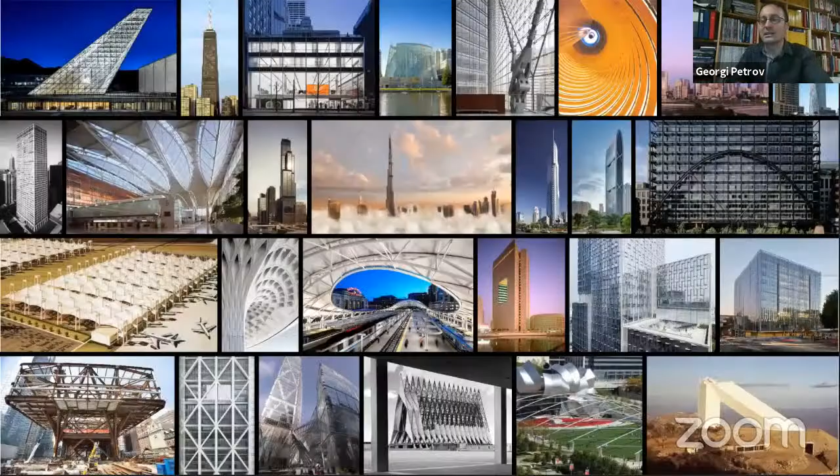We're good? Excellent. So as Sandra said, we're from SOM, Skidmore, Owings and Merrill, and we've had a long history of varied projects. We do all sorts of different types of healthcare, education, public buildings, and a lot of airports. We have offices all over the world, mainly in New York, Chicago, and San Francisco, but we also have an office in Dubai, several in China, and in London, in Europe.

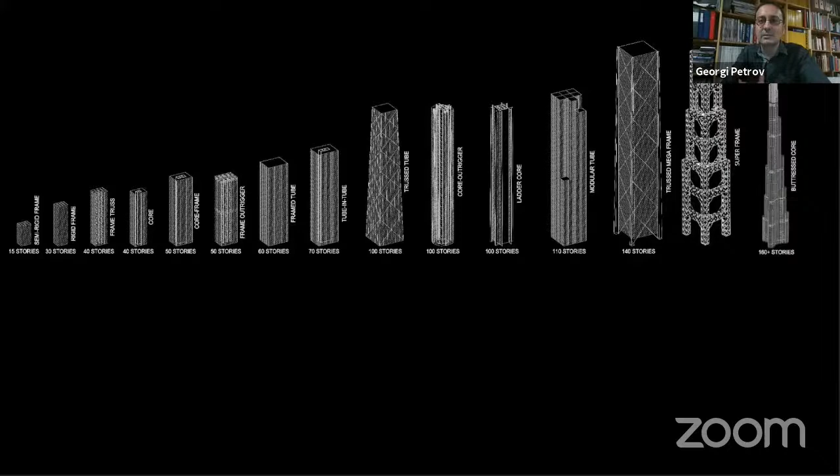Primarily, we're famous for our super tall towers. This is a little bit outdated, but at any one point, we have 4 or 5 of the top 15 towers in the world. Not only that, but we've developed the structural systems for super tall towers. Most of the different types of systems, the very first examples, were done by us at the very beginning.

There's also a wide range of research initiatives happening throughout SOM. We've actually assembled teams, interconnected across offices, working on various topics such as computational design and fabrication. A lot of these are really interesting projects for us to just learn about new processes and new materials, and then learn how to apply that to real architecture.

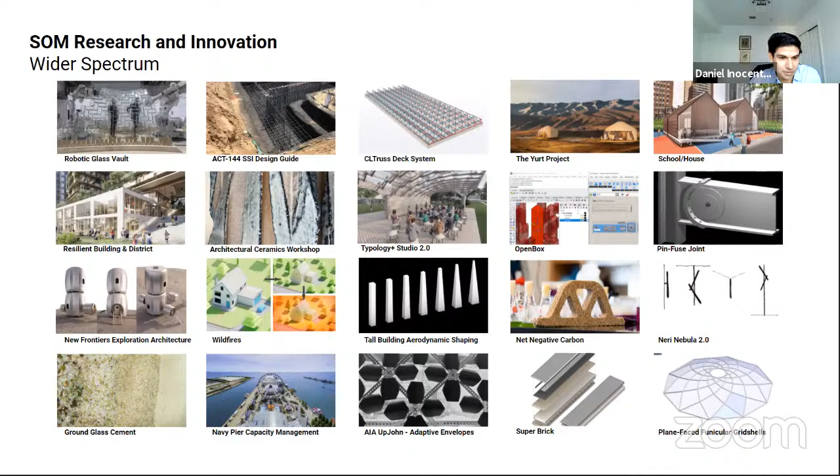Can you go next, please? Yeah. Oh, no, go ahead, go back. Sorry, there was a lag there.

This is to showcase that SOM has been involved in the evolution of how we use digital technologies. Throughout the history of SOM, there's been a lot of interest in not just implementing, but also creating and customizing digital tool sets. SOM was one of the first to actually develop its own CAD software, called AES, in the 80s, and this has continued to take place at SOM at various points in time.

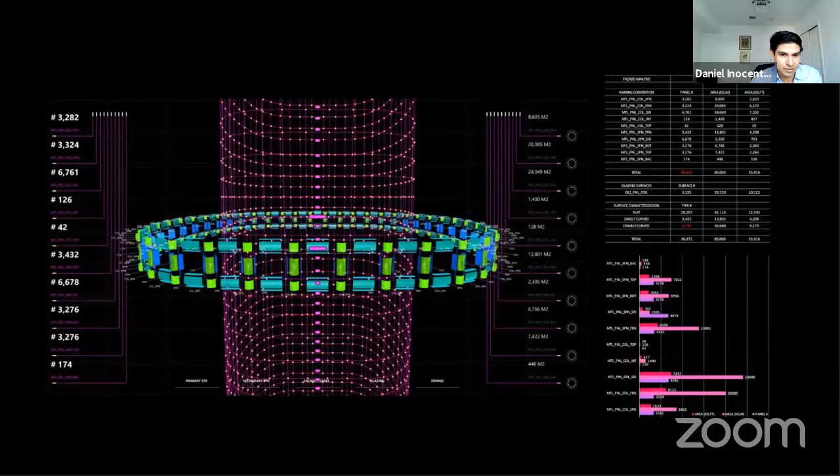This is another example of that. This is for a tower in China, where we're looking at how to optimize geometry for glass fabrication.

Over the last 4 or 5 years, Daniel and I have been trying to harness this long history of capability at SOM and apply it towards design for structures in outer space. The project we'll talk about today is our first big project of many we're having now. This was a collaboration with the European Space Agency and MIT, organized by SOM.

We tried to take the challenge that Jan Wörner, the former Director General of the European Space Agency, posed back in 2015, of this new idea of how to go to the moon in a novel way—to take the paradigm and lessons learned from the International Space Station, where instead of competing, we have a common goal. If we share a common infrastructure, many different partners can go to space more easily. So taking this idea of collaborating instead of competing in space, and applying it to the moon.

He colloquially termed it the Moon Village. There's been a very reinvigorated and interesting discussion the last few years of how to go to the moon in this better, more collaborative way.

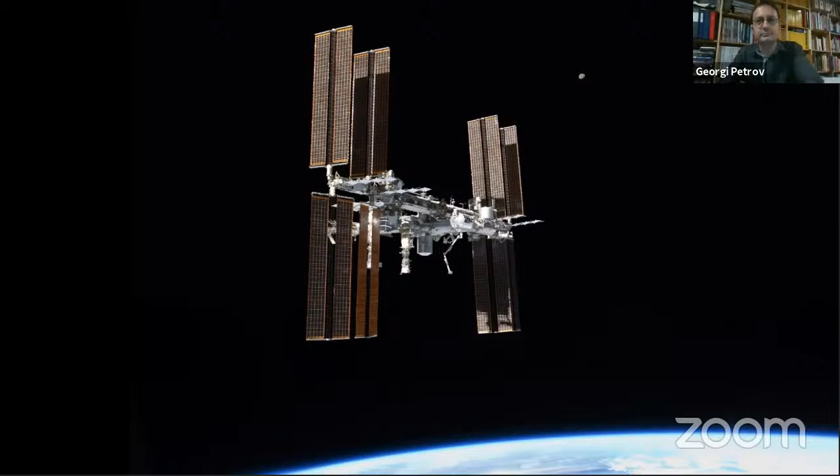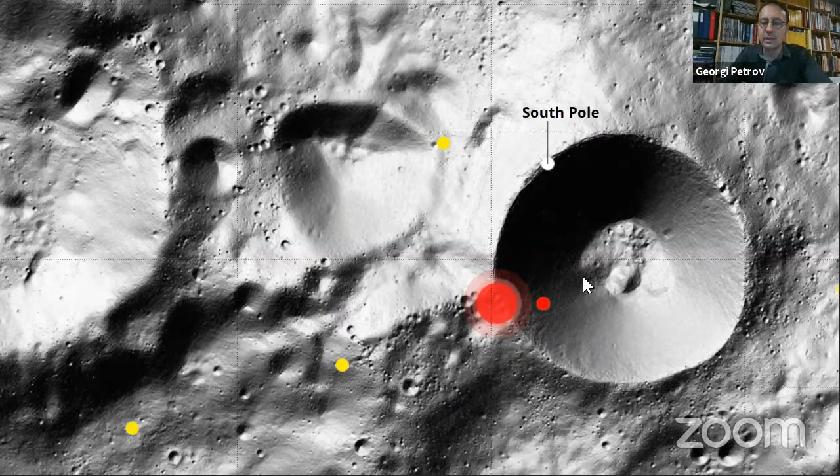I won't go into it—you probably all know that the two poles are the most exciting and interesting places to go. This is the southern polar region, with the South Pole right here at the edge of this big crater, Shackleton. There's been a lot of research on where the best place is, and we've chosen this one area along the rim of the crater to develop our project.

You can see here again, the crater is really deep, and most of the interesting science is down at the bottom of the crater, but it's always permanently shadowed. While at the very rim of it, at the highest points, it's actually lit by the sun for a large portion of the year. So you do have an opportunity for generating a lot of energy.

There's also some smaller craters that are a lot more easily accessible that you could do science on. The idea is that we have probably frozen water and other interesting volatiles hidden there, which are both interesting scientifically and interesting because they're a resource.

We looked at the long history of ideas of how to go to the moon, going back to the 50s and 60s, and more excitingly, in the last 4 or 5 years, partly spurred by this idea of the Moon Village, and partly because a lot of new and exciting commercial players are entering the field. We feel that it's finally time where soon we could realize this dream to go back to the moon in a more permanent and sustainable way.

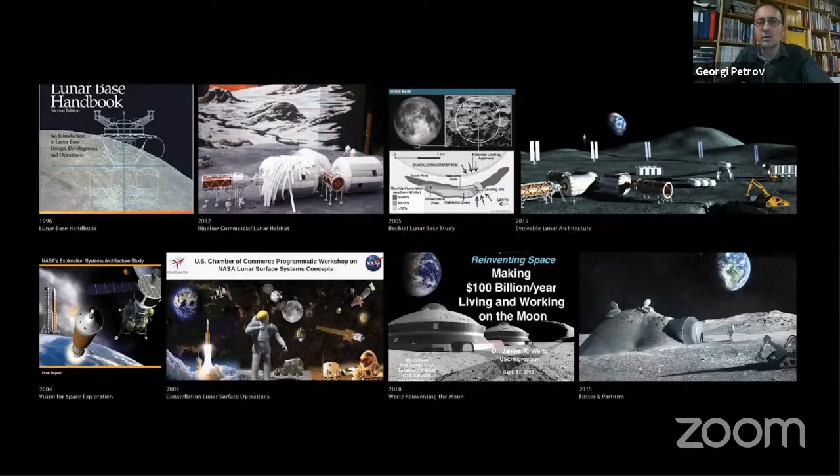So we looked at several different scales. We started with the master planning idea, and the idea that you can lay out a growing settlement with this criteria of safety—every bit of your habitat has to have access to other bits of it. So if you lose one part, you can't lose or separate different parts of the habitat. Everything has to be efficient for obvious reasons, and easily expandable.

We looked at very different urban planning ideas, and we settled on this one—the idea of a linear city, which was brought forth in the beginning of the Industrial Revolution by the Spanish architect Arturo Soria, and made famous by Le Corbusier with his plan for a linear city. Here the idea is that you could have a spine of infrastructure that grows in both directions, very efficient in moving materials and humans back and forth. But if you have several bands of it, you could have safety and interconnectivity.

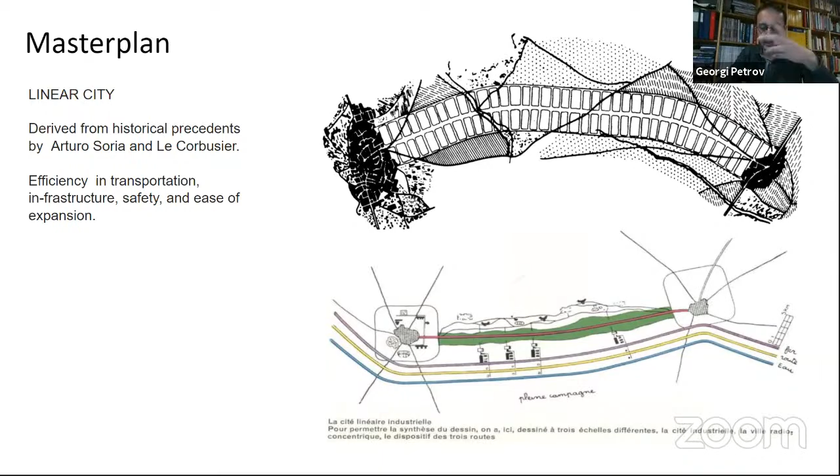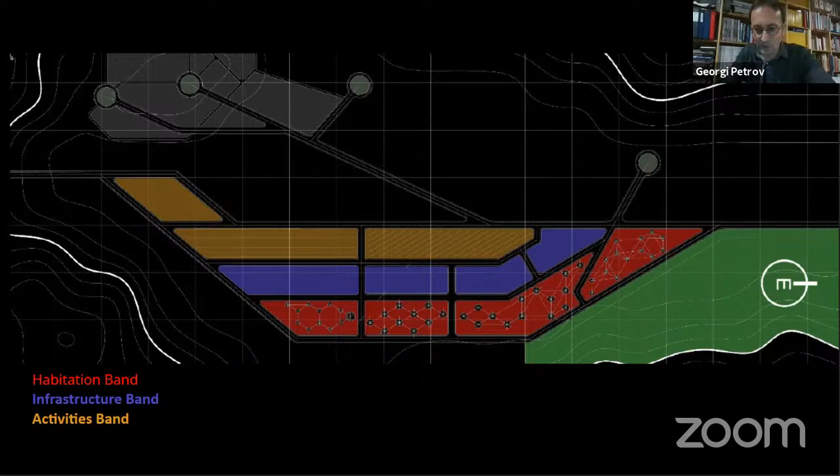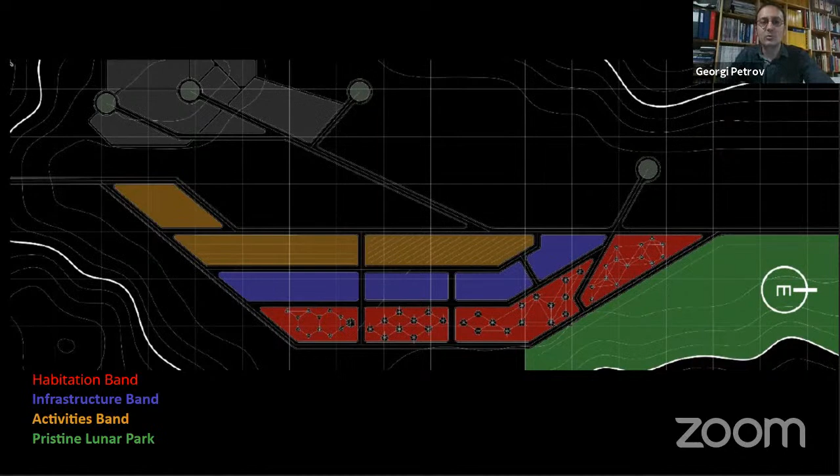So besides the engineering, we said you would need some sort of place to leave undisturbed, maybe along the crater rim in the direction of the Earth, where you would have an undisturbed piece of the moon. So as the humans go around, there's always a bit of undisturbed moon, and we thought we'd place it in the direction of the Earth, so from the habitats you always have this view of the undisturbed, pristine, beautiful moonscape, with the Earth always behind it.

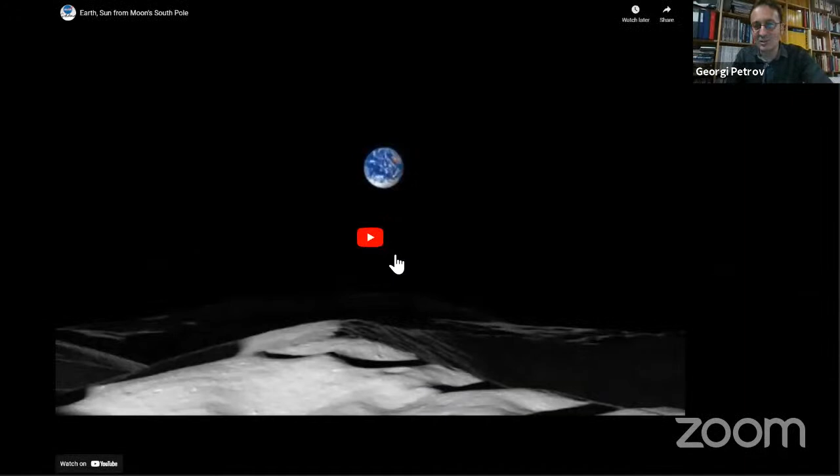And this is actually a cool view. Daniel found this yesterday, a new animation by NASA that shows that view.

This is the rim of the crater, and the sun always travels along the horizon. Because of the moon's orbit, the Earth is always in this direction. It never really strays. Throughout the month and the year it kind of wobbles, moves up and down around the sky, but it's always in that one direction. It stays like this, spinning around.

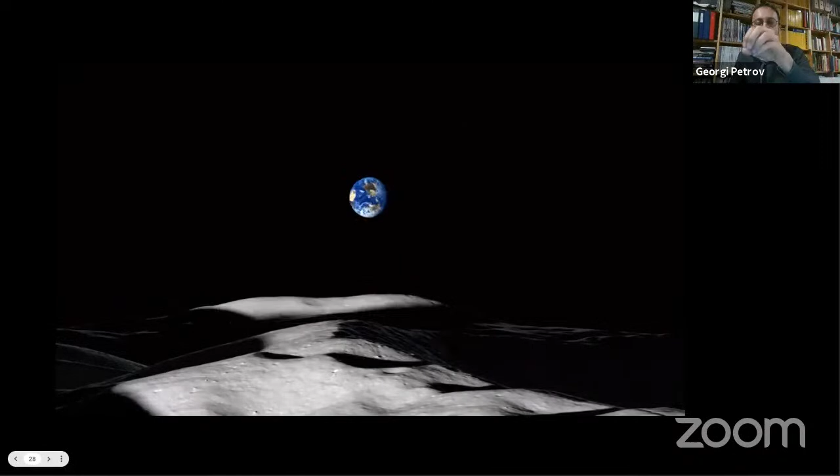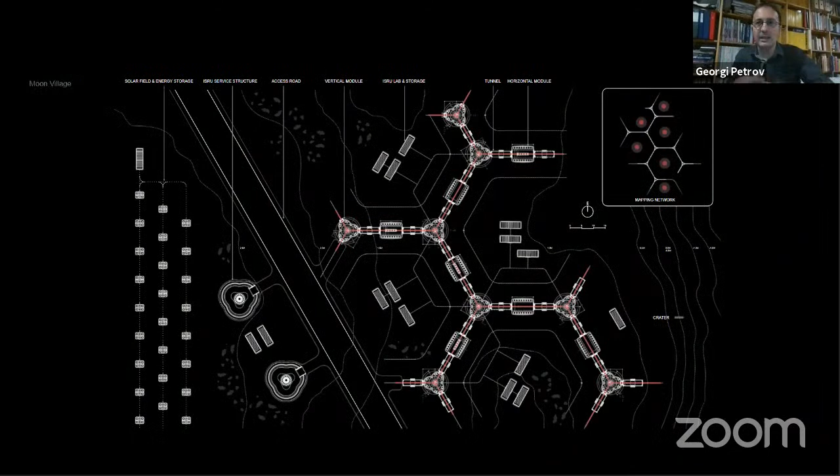So we started zooming in with this master plan idea and laying out the individual habitats, with some ideas of how they could grow together and be interconnected. This is an early stage where you have a few of them starting to be accumulated.

So going in from the master plan into what the individual habitat is.

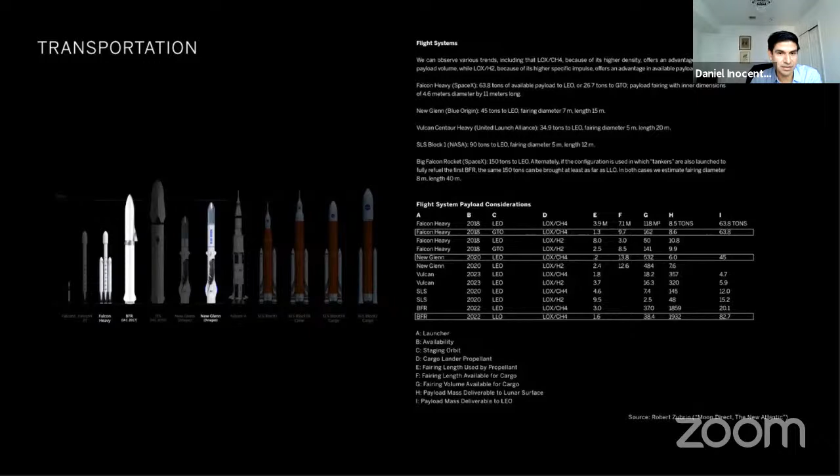The methodology was to first establish what we were trying to accommodate: a crew between 4 and 6 for a mission duration of around 300 consecutive days. The habitat had to be deployable, meaning we were designing, engineering, and fabricating it on Earth so it could be launched, delivered, and prepared on site on the moon, ready to be occupied once the crew arrives. This set the baseline objectives for how we would approach designing the infrastructure and the habitat from a human perspective.

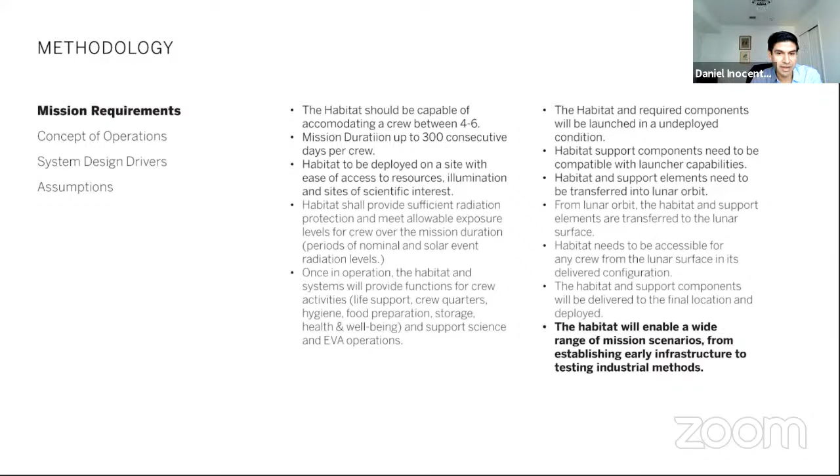The various mission phases we took a look at included testing some of the features in the habitat, since we were designing something hybrid in terms of structure; the launch sequence, looking at how we'd take the habitat into low Earth orbit; what assets we'd need to move it from low Earth orbit to lunar orbit; and what we'd need to land it, requiring a customized, purpose-built lander just for this habitat. Once down on the surface, we'd need equipment to transfer it from the lander to the building site. All these elements and features were part of the architecture we were putting together.

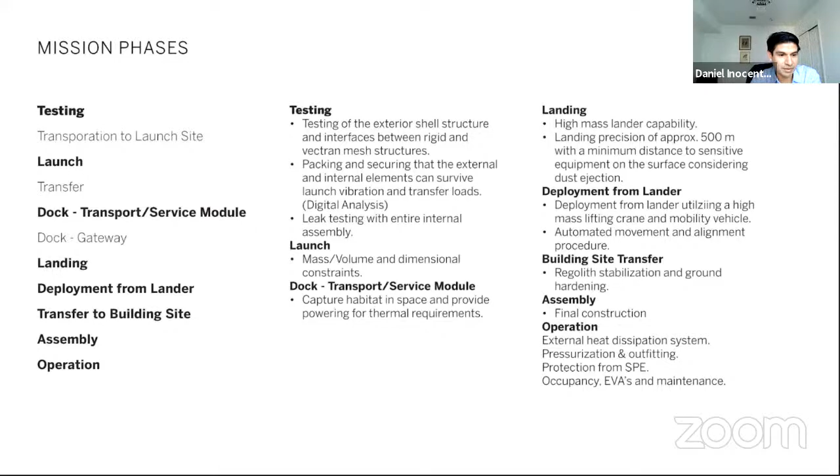Everything started with discussion about how we could use what we knew, which was a lot of architecture around the ISS. The ISS is mostly metallic structures, isogrid-type pressurized vessels with added thermal protection and shielding for impact on the outside. We wanted to take a close look at this architecture, learn from that technology, and also think about using new forms of structures already tested by NASA and deployed on the ISS through Bigelow — these were inflatable shell-type technologies.

We married the two structures, and started to look at how you could take this idea of a woven mesh and discretize it, breaking it up into different elements around the geometry, integrating that with hard elements like airlocks, metal structures, or windows. This is part of the challenge of working with woven mesh structures — how do you integrate these with rigid elements.

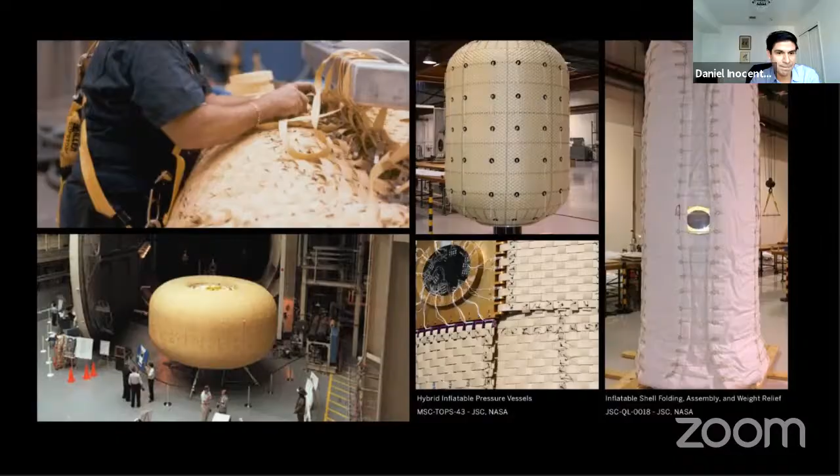This is an image of the hybrid structure we designed in its compact configuration. You can see in the illustration how you'd take this habitat, pack it, tie the shell inboard, and then protect it with a fairing before preparing it on the launcher.

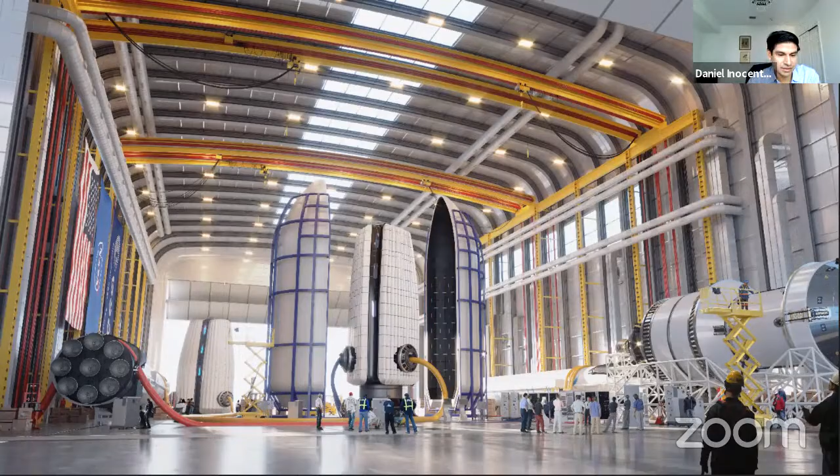Here are some of the mission components we took a close look at. The first is the habitat service module, which supplies power to the habitat when in transit, maintaining the right temperature for the life support systems. If it gets too cold or too hot, these systems with sensitive hardware and computers need to be in a controlled environment.

The other element is the airlock module, which was not part of the habitat architecture itself but external — having it outside means you avoid, or at least mitigate, bringing dust into the habitat module. There's also the tug, which had to be designed and sized for the habitat mass, since it would take the habitat from low Earth orbit and push it all the way to lunar orbit. For the launcher, we discussed various vehicles, but the SLS was the architecture we went ahead with.

And then the lander, which was also one of the biggest elements, because you need to take that large habitat structure from lunar orbit down to the surface. And of course, there's a lot of fuel involved, which actually makes up the majority of the mass. So that's something we had to consider.

And then once you have the habitat in place, you also need a power station, some form of energy to power your architecture and your infrastructure. We looked at two types of power stations: one was a nuclear fission reactor, and the other was an array of solar cells.

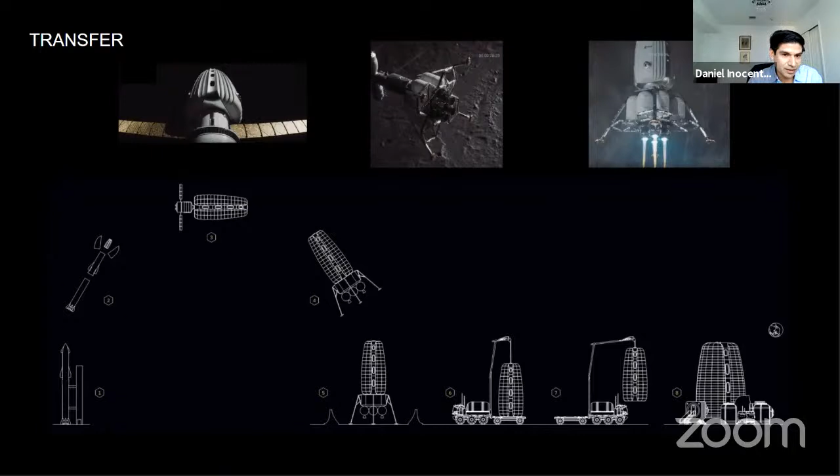If you go to the next slide, please. Here are some additional illustrations showing how we imagine the sequence of events taking place. We worked with a really amazing animation company to put a video together, so these are still shots from that animation, but some of these elements are already pretty detailed. The focus was to illustrate how you would take the habitat from this large lander, which would deliver the habitat really high up above the lunar surface. You would need a crane to take the habitat down to a platform that would then be pulled by a vehicle to its final destination, where it would be assembled and deployed.

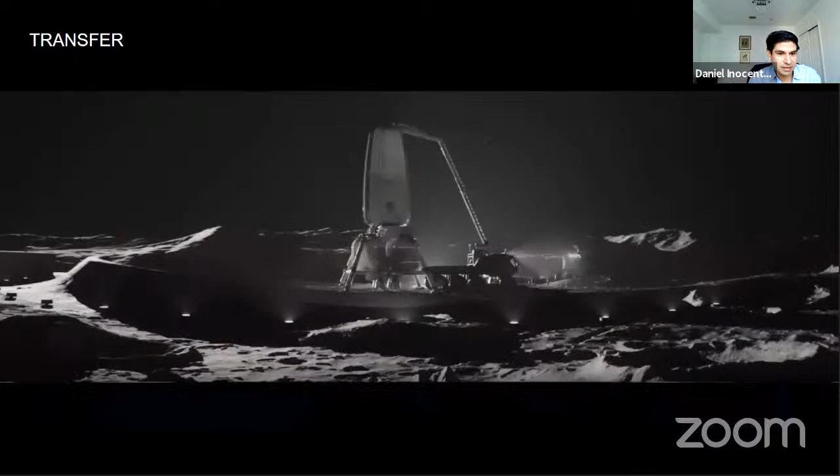If you go to the next slide, here's an image of what that looks like.

And so for crew accommodations, again, we looked at the ISS for volumes, trying to understand how much volume you would need for a mission duration that we had targeted. I think the key was that we wanted to make sure we had no less than 25 cubic meters of habitable volume per person.

But we also wanted to understand what the implications of living on the moon would be, because it's different from a microgravity environment. On the moon, you actually have gravity, so you still have to deal with friction. Your movement is very different, and you also have a wide range of spaces that you want to accommodate inside of this multi-purpose structure. After looking at various iterations and really studying what the best net habitable volume for the mission architecture would be, we landed at somewhere about 80 cubic meters per person.

And if you go to the next slide, here are just a list of the different human factors that we started to consider. Things like visibility, being able to locate what it is you're looking for or where you're going, or being able to identify equipment when it needs to be fixed or upgraded, or having proximity to computer screens and making sure you can see as much of your surroundings as possible for communication.

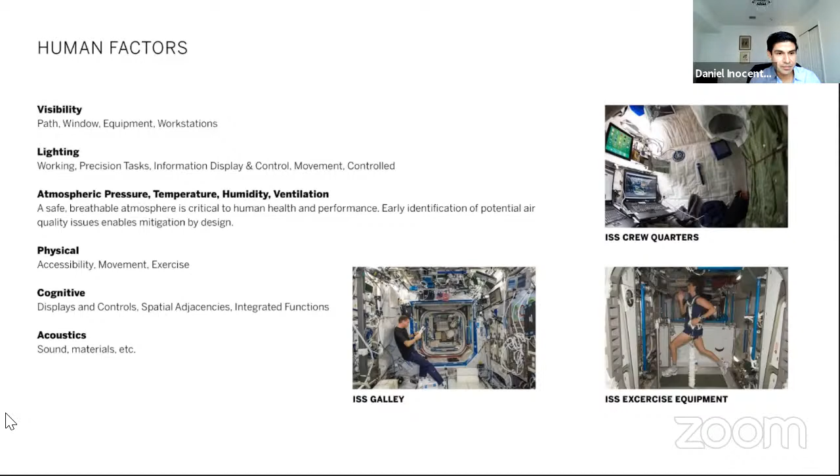If you go to the next slide. Here's another list of different kinds of human factors we looked at. Again, volume is a key element here. Accessibility, making sure you can mobilize your body from one location to the next. In our case, we had a vertical structure, so it was important to be able to move vertically through the structure. And the crew quarters, we wanted to centralize these spaces because we wanted them to be as private as possible, but also communal. There was a key design decision there in how we distributed those spaces.

Mechanical equipment and storage and supplies is another factor, which you see in these images, that there's things all over the place, whereas in our design we really tried to emphasize the need to locate mechanical equipment and storage in locations that are accessible but don't impede your mobility or your focus on what it is you're doing, so you can put these in certain locations behind panels. If you go to the next slide.

Here's an image illustrating how we thought about daylighting. This is pretty typical for how we approach design, but it's really unique in this case, because electric lighting is always there to supplement natural lighting. We always want to use natural lighting as the main driver. But when you're on the moon, natural lighting is a real challenge, so you have to find ways and opportunities of creating these natural rhythms. This could be done through locating lighting on various surfaces below, at eye level, and above you.

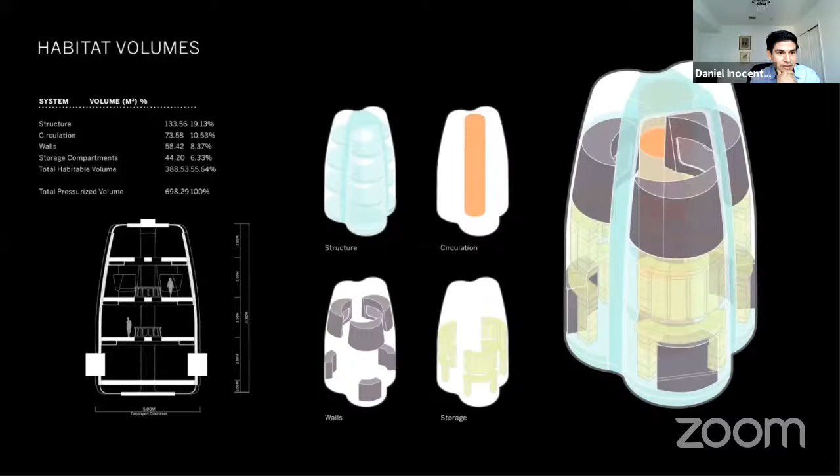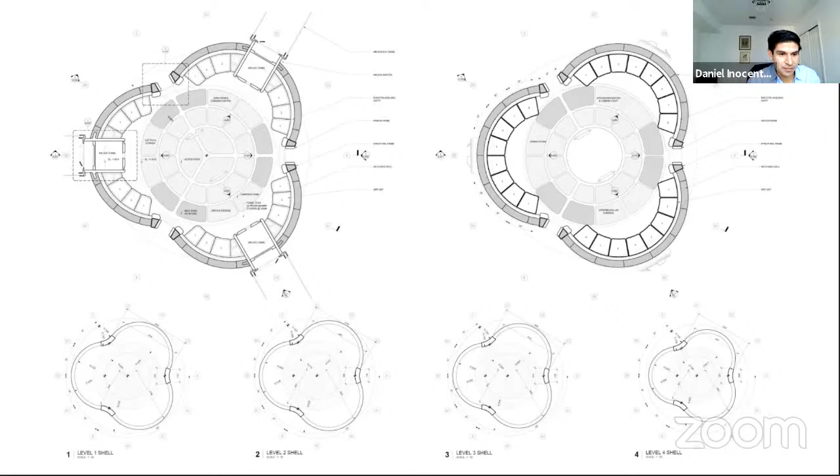This is a section through the module. You can see how the spaces are broken up. From the ground floor, this is more of all the working equipment, things you need to prepare for exiting the module for EVAs, and also a place where you can repair your suit and do exercise—very heavy activities. The second floor is where you do experiments, with laboratories and biological experimental equipment. The third floor is where the crew quarters was. And finally, the fourth floor, where we tried to locate a kind of garden where you can produce your own food to help offset some of the life support system requirements, but also to help you have access to vegetation.

Further on in developing the design for the environment outside of Earth's protective atmosphere and magnetic field, there are really three types of radiation you have to contend with. There's the solar wind, a constant stream of charged particles which is pretty low level and takes only a little matter to stop. There's also galactic cosmic rays, the same type of particles but generated in supernovae, traveling throughout the universe at near the speed of light. Being on the surface of the moon protects you from half of them due to the body of the moon, but it's really hard to stop them.

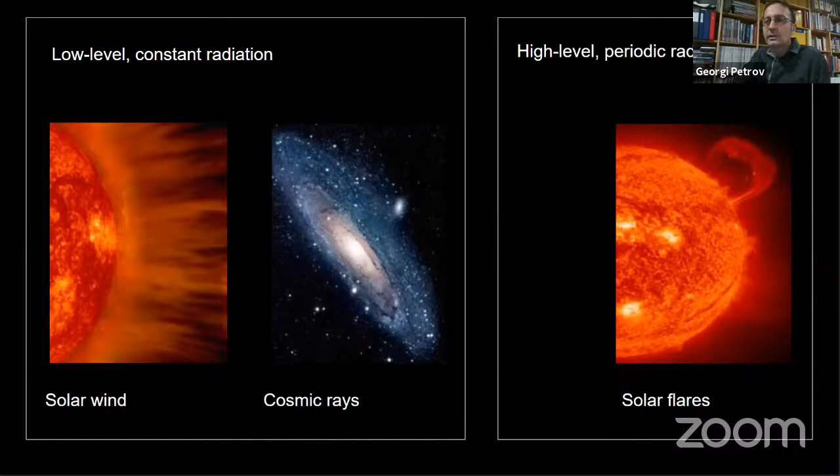And then there are solar flares, which, depending on the solar cycle, every once in a while the sun spews out a lot higher level of particles. The good thing about these is that they're predictable. We have a suite of satellites monitoring the sun constantly, and because these particles travel relatively slow compared to the speed of light, you get about an hour or a bit more of warning, and they pass by pretty quickly, so they don't happen very often. So the strategy for defending against those is to just have a hardened part of the habitat where the crew can shelter for a little bit while they pass.

So here, these are the solar particle events, and then galactic cosmic rays.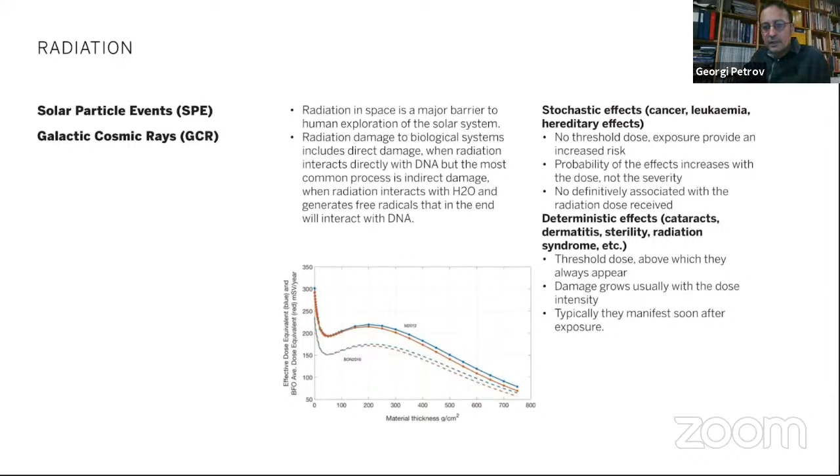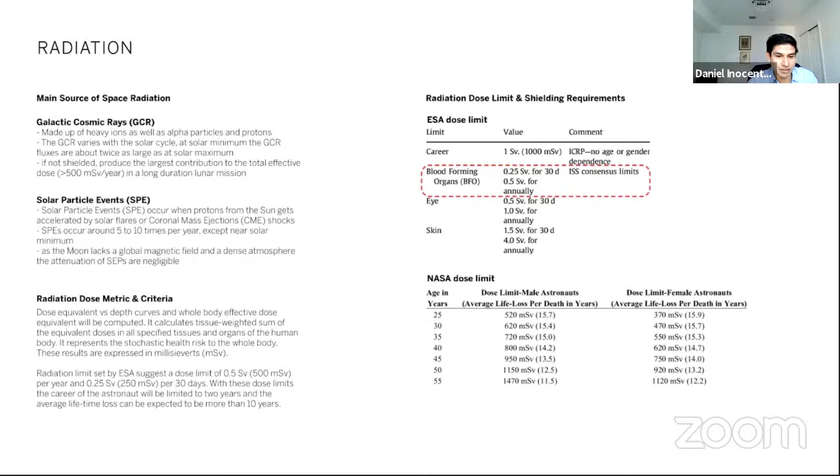There's also some available software you can consider using for these studies. There's, for example, open source software like OLTARIS, which is NASA developed software. You can query their available materials list and look at what you're actually building, in terms of assembly and thicknesses, and that can help you understand how much radiation you're getting through all that material.

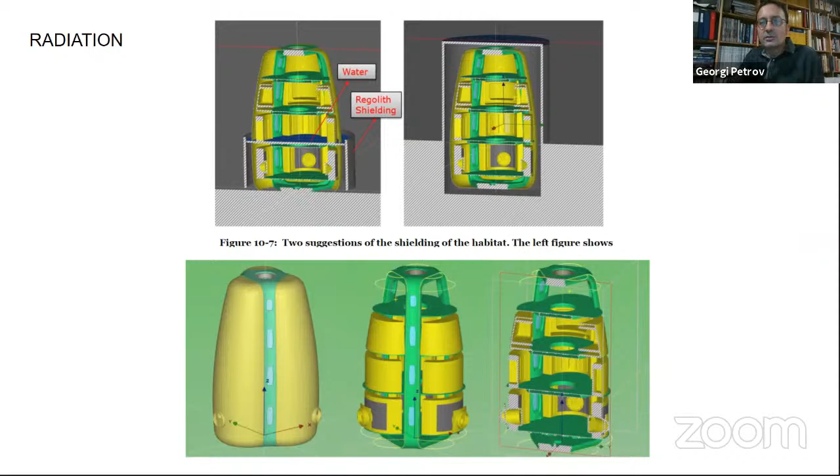So the CDF team built a special model using our geometry and the way we laid out all of the storage and materials, and tested different ideas for shielding. One was to propose, as you'll see illustrated, building a sort of regolith wall around the base, which could serve as a shelter for hiding from solar particle events. Maybe a little more radiation protection comes from actually burying the habitat partly, but that makes it challenging from a standpoint of connectivity and access to the surface and things like that. So there are different ideas for how to protect the habitats and the inhabitants from radiation.

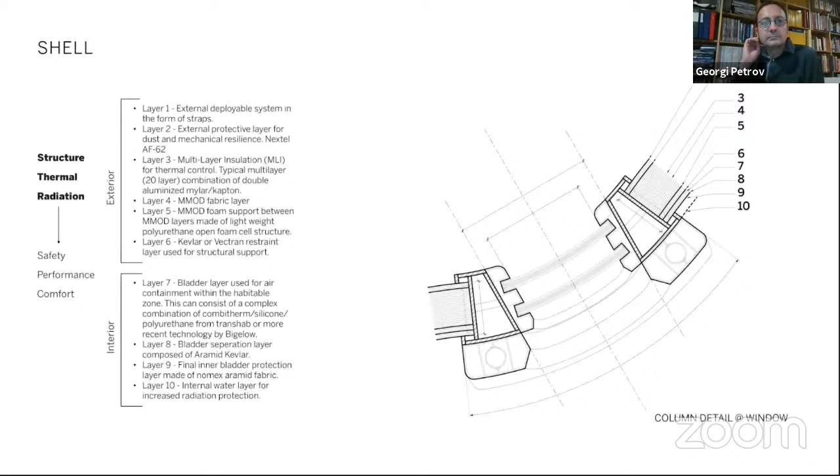This is a cross section through one of the windows and columns. I think we mentioned this at the beginning, but the column is integral to this idea because essentially it's like an exoskeleton that wraps the structure, and the mesh, the deployable mesh, is supported by that. So this is trying to capture that detail. When we worked on the geometry for this model and the CAD model you saw before, we actually started layering each of these layers discretely to provide ESA with the ability to apply a material attribute to each one of these layers. You can look at the list on the left, which goes from the exterior, from structure to thermal to radiation.

Initially, you have the external protective layer, which protects against dust and impact, in the form of a material product called Nextel AF62. Following that, you have the multi-layer insulation for thermal control, made up of a series of multiple layers, a combination of double aluminized mylar and Kapton. Then you have the MMOD fabric layer on the inside for redundancy, and finally another layer of foam. All this is outside of the structural layer, which is that woven mesh, helping support the atmosphere on the inside. Then on the inside, you need the bladder, which contains the air. Following that, you have some additional materials for protection and for people to interface with. This is very important because whatever the crew is exposed to needs to be safe for the crew to use; you don't want too much outgassing.

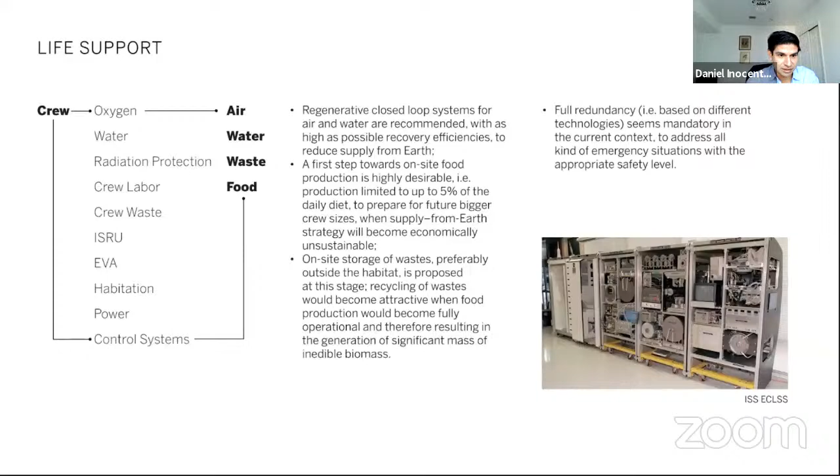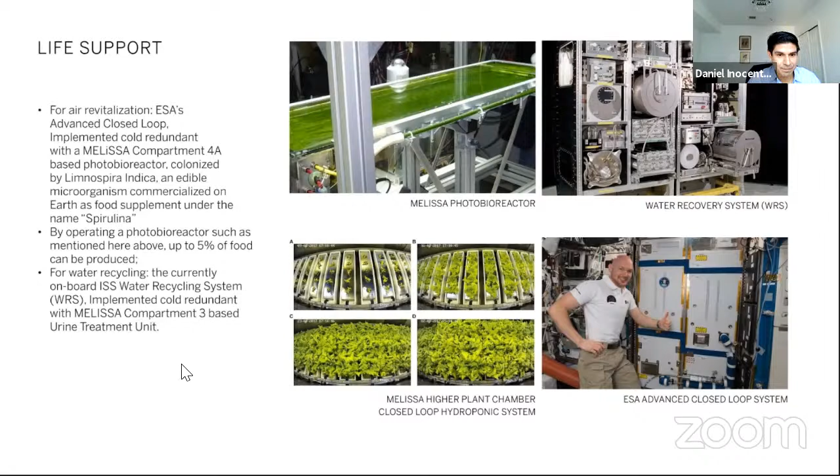Finally, to talk about power - this was very important because as soon as we identified how much power that habitat required, which was a power requirement of 59 kilowatts for just one habitat, we saw that the power station was extremely large, because you have all these solar panels and a lot of the substructure. You would have to assemble these on site. It's a lot of work to do. It's possible you could do that, and it would definitely be more in line with self-sufficiency.

But we also have the option of using a fission reactor system, which weighed a lot less than the solar power station. When we sized the fission reactor compared to the power station, the fission reactor was about 5.6 metric tons, compared to the power station, which was more like 15 metric tons. So it was a big difference.

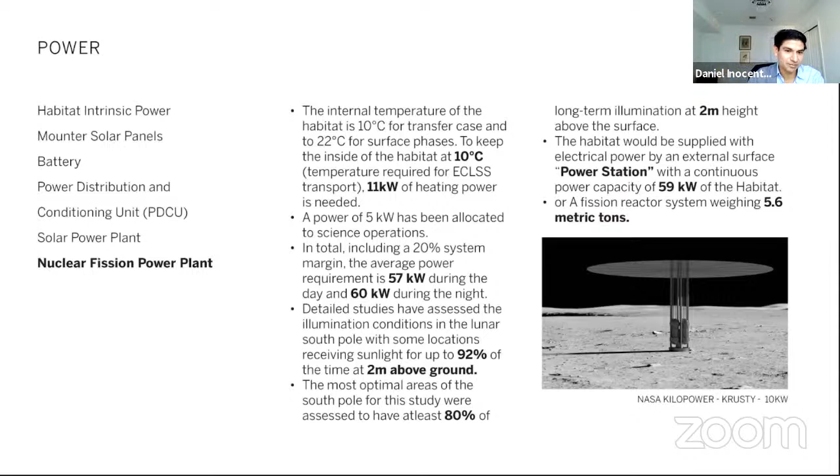The other thing about solar power is that it has to be strategically located. You have to place it well above ground, it has to have high exposure to sunlight, and you have to be able to track the sunlight. It's a pretty complex system that you would need - you're not talking about your typical solar panels that you put on the roof on Earth.

A little bit about the structure, and to give you a sense of the challenges of designing the enclosure for these habitats - on Earth, as architects, we mostly support our buildings to stand up, and a typical gravity load on a floor you're standing on is usually 2 to 5 kPa, maybe 10 if you're designing a library or heavy storage. Compare that to the challenge of containing 1 atmosphere - 1 atmosphere at sea level is about 100 kPa, so 10 to 20 times more force than just supporting a floor on Earth.

One strategy is that, well, we have humans that live high up in the mountains - if you take the biggest cities on Earth that are really high up, for example Potosi in Bolivia, a sizable city where the atmospheric pressure is about 60% of sea level pressure, even then you're still talking about an order of magnitude more force. That is why all of these space structures are some sort of cylinder or curved structure that contains the air pressure in tension as much as possible. So having flat surfaces on a pressurized vessel is really, really difficult - that's why things look bulbous or cylinder-like in space.

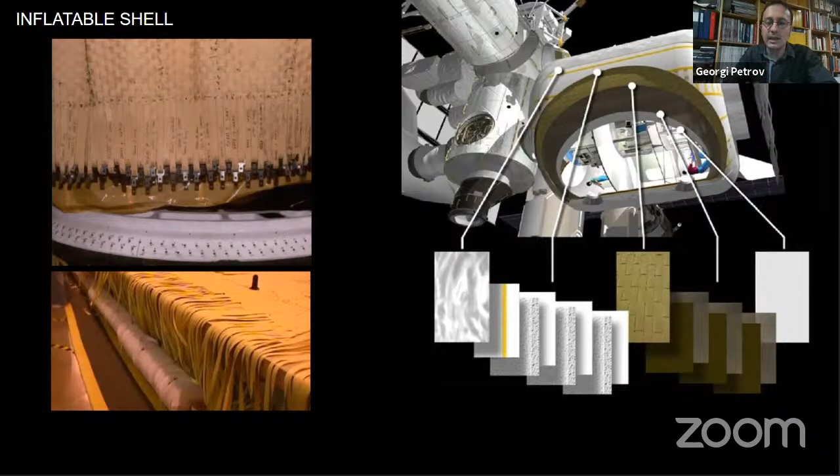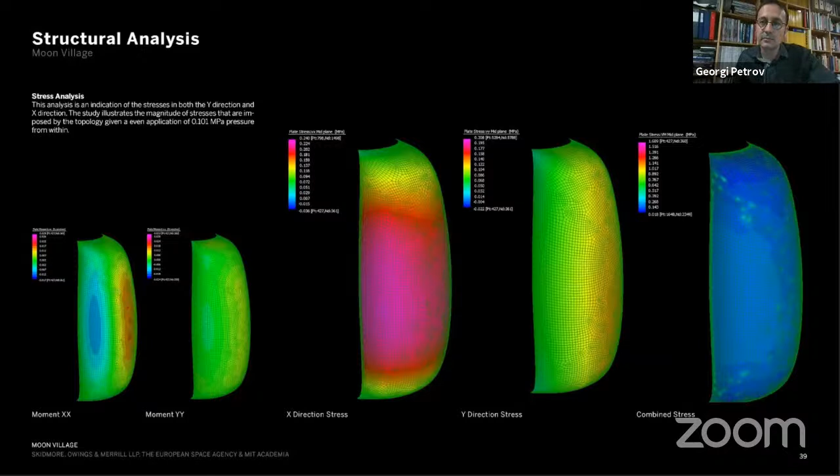We try to be more creative with the exact geometry. This is a study for one of the petals where we use some plugins for Grasshopper and Rhino in order to compute the exact shape that the membrane will take given the boundary conditions. Here we studied the tension, just to show that we got the right shape. If you develop some kind of complex shape and apply a pressure normal to it, if there's no moment, that means it's carrying all of the load in the membrane, in the plane of it, so you have the correct shape.

To constrain it, you still need, during launch for example, transfer and landing, besides the atmospheric pressure, a lot of dynamic loads from the launch, which can go up to 3 to 5 Gs for human rated rockets, up to 10 Gs for non-human rated rockets. So it still requires a rigid shell, which we decided to place along the perimeter, creating this 3-petaled design. This is key because it leaves the center space open for the architecture that Daniel described already.

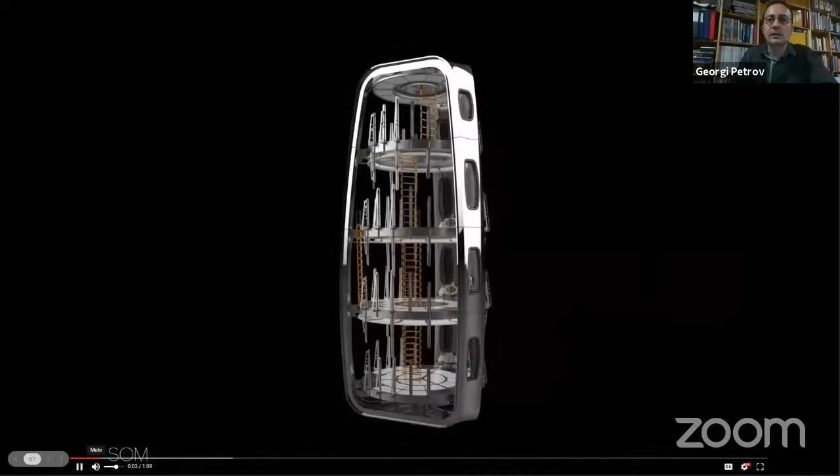I think this is a quick little rotation of what the structure could look like.

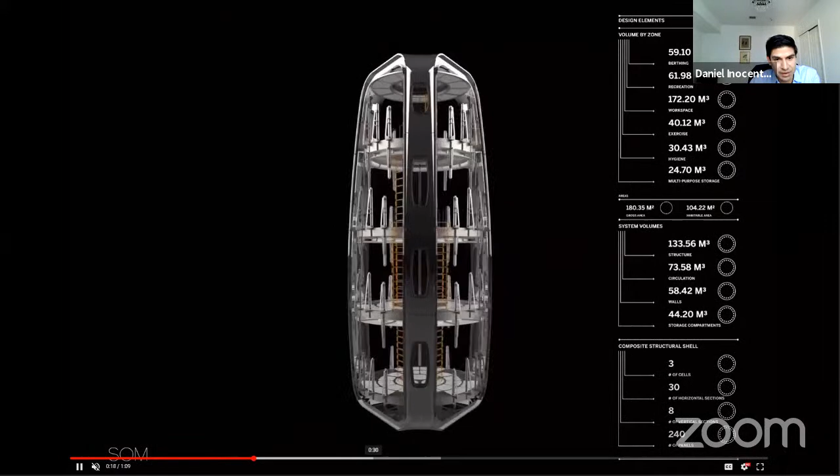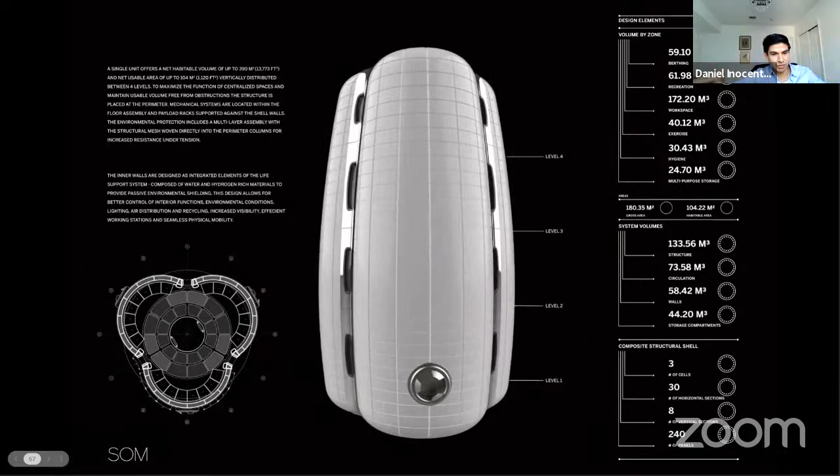Just to summarize, I think overall what we designed here is really focused on habitable space. The habitable volume was about 390 cubic meters, and we had a habitable area of about 100 square meters distributed between the 4 floors. But you need to project those floors outward to be able to get that extra area. I think we really tried to integrate as much technology into this design process as possible.

At the same time, we were also talking to an astronaut, Jeffrey Hoffman, who was working in tandem with us to think about how we can make this more human-centric.

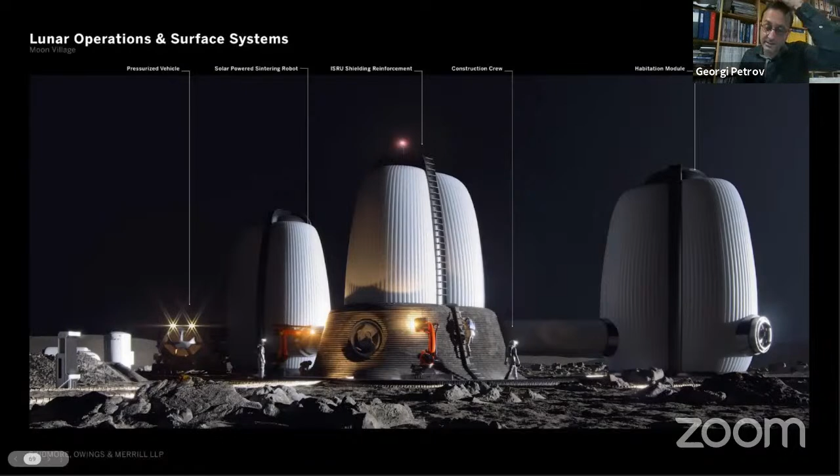This is some of the ideas of once you get there and can start experimenting with using the local resources. One thing they could easily do is build this protective shell around the base floor. Once you have the module in place, it will give you extra radiation protection against solar flares. Remember, at the South Pole, the sun is always along the horizon, so all of the radiation from the sun comes horizontally at you, not from above, like we're used to here in mid-latitudes on Earth.

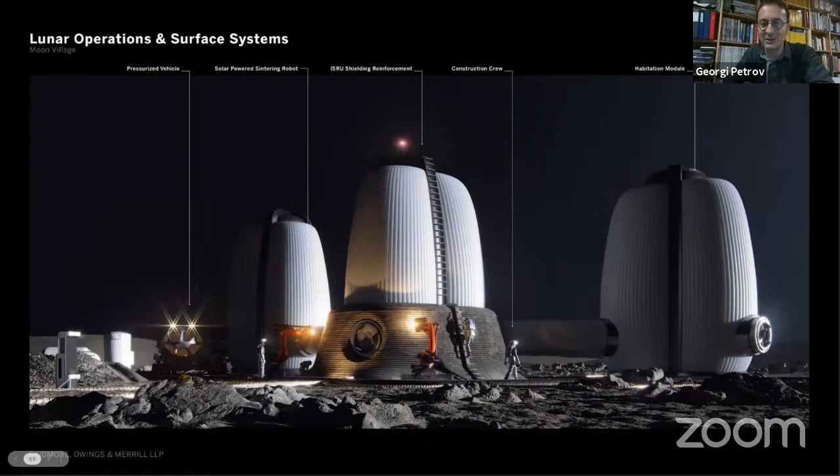This is sort of a vision of the future. We designed the first habitat, but the whole idea of being there is that as you live on the moon, you learn how to build architecture for the moon better. So this is an idea of how in the future you'd experiment with locally constructed habitats to help the moon village grow.

In 2019, this is when we first got invited to the Biennale, which was supposed to take place in 2020, but got postponed to 2021 because of the pandemic. The invitation was to bring this idea of the moon village to this large event, which would bring a lot of architects from around the world, and at the same time get others thinking about future societies in space. The theme of the Biennale was to imagine how we were going to live together and rise to new societal challenges.

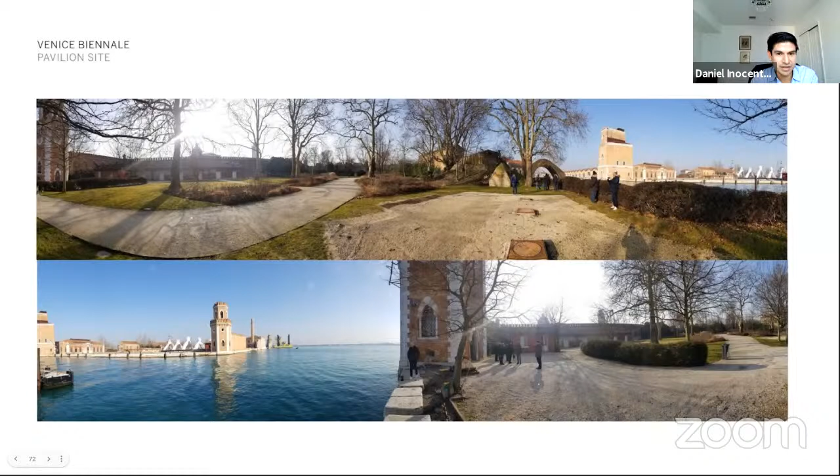It's called the Giardini di Biennale. Yeah, the Giardini di Biennale. You can see here in this image, this is our selected site right next to the water. We were actually asked to bring this large scale pavilion, which would be a mock-up, an architectural mock-up of what the Moon Village habitat would look like. If you go to the next slide.

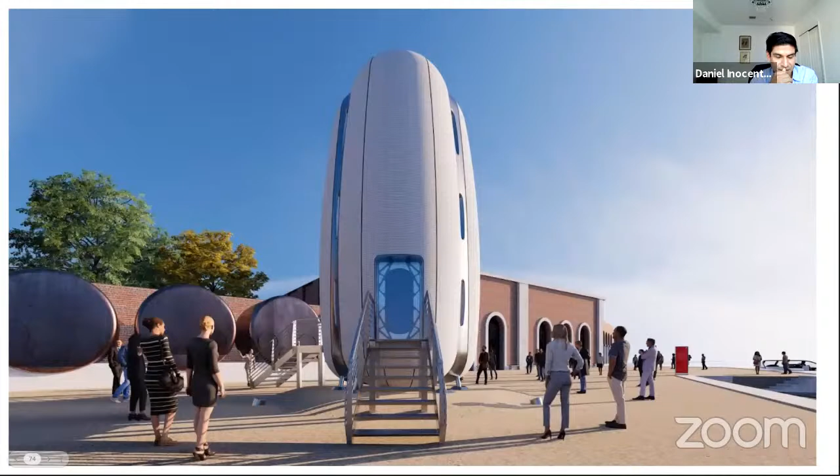We had to customize this for Earth conditions, so we included this large door at each pedal and put in the staircase. We engineered this to actually work really well for Earth, but the idea was to try to simulate what it would look like and feel like on the moon.

If you go to the next slide.

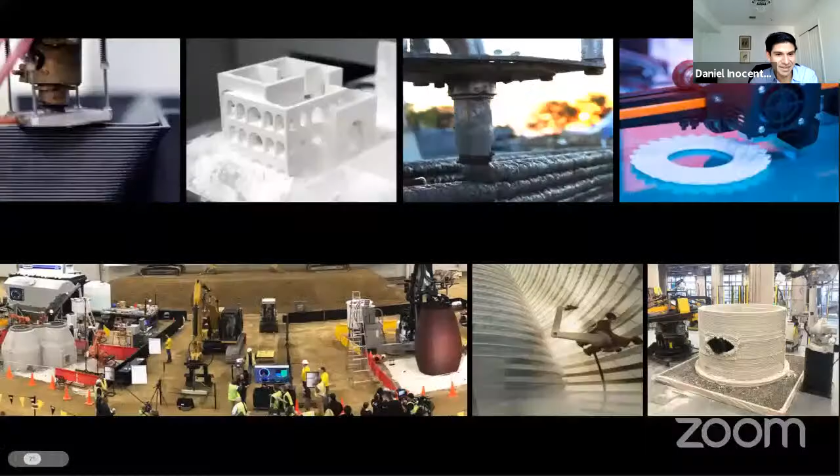One innovation we wanted to use on this pavilion as a test bed is to experiment with different ways of additive manufacturing. I'm sure you're familiar with 3D printers of various sorts, and NASA has been, through their 3D printed challenge in the last 5 or 6 years, trying to get people to think about how we could use this technology in space. Most of what people are familiar with in 3D printing uses polymers for these prototypes that are quite fragile, and people are starting to invest in more durable materials.

Like Daniel mentioned, we have this project on how to 3D print in concrete. For outer space, we think some kind of metal would be a good idea. Welding is exactly what 3D printing is, delivering a little bit of material and adding it over time. So if you take a welding torch and attach it to a computer-controlled robot, you could have 3D printing in metal, steel or aluminum.

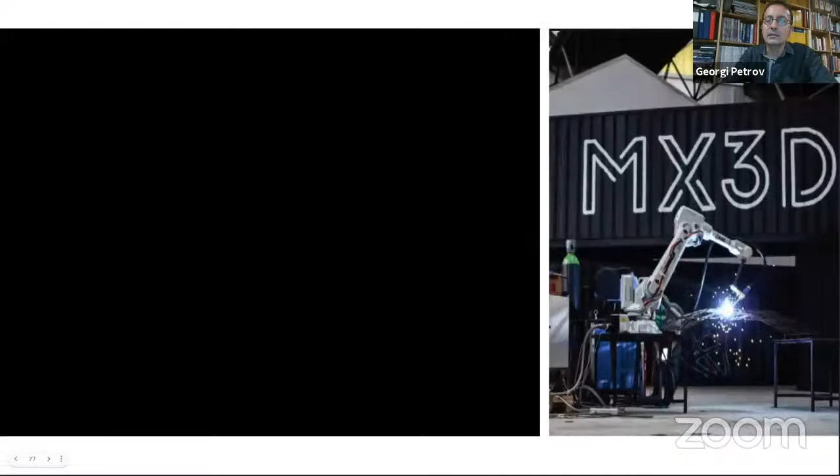We partnered with a company called MX3D out of Amsterdam that does exactly that. They have a series of ABB robots that deposit, welding one layer at a time, and de facto 3D print in stainless steel. Recently they've gotten a lot of press for a bridge they built and exhibited a number of times, which you might have seen. They recently installed it on a canal in Amsterdam, so you can actually go visit it yourself.

We took this idea and looked at how we could apply it to our floor system. When you 3D print, the different layers have different properties, whether along the deposit length or across the deposit beads. So we figured that for an internal structure it would be really good. There are still a lot of technical challenges to work out, like how to contain the pressure, but the internal floor would be a perfect target for 3D printing.

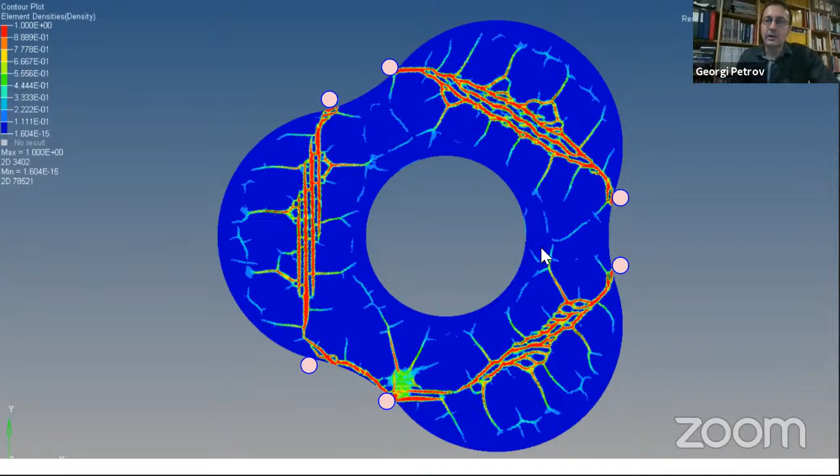We took the support points for our three vertical frames and applied form-finding software to figure out where the best place to put material is. It runs a bit like this, starting with the floor and then going through an iterative process that gives you a guide of where the material should go. Obviously this isn't ready to print as-is, since it's just the output from the computational software, so we went through a series of steps to rationalize it into something more uniform.

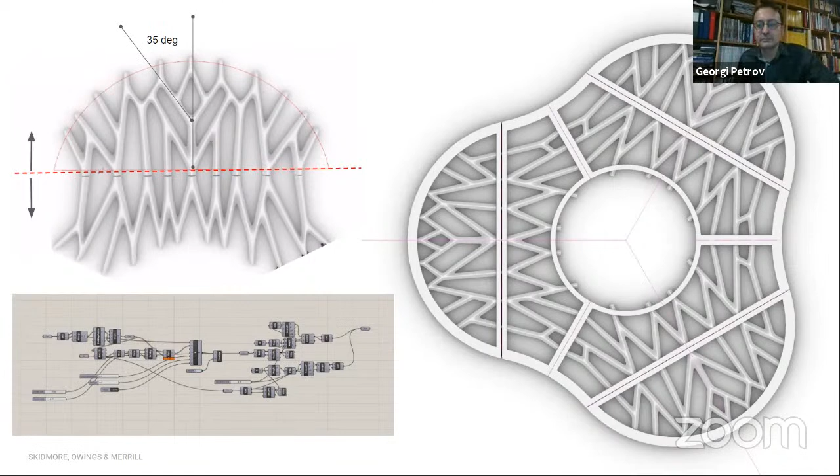Oh, Daniel, do you want to talk about how we adapted this to the process? Definitely, because we also had limitations coming from the robotic manufacturing process itself, and that really helped drive how we were interpolating the geometry from the analysis model.

Because with the 3D printer, if you imagine that top image on the left, as you're printing vertically, the more inclined you are, the less adhesion there is from one bead to the next. So the incline was limited to 35 degrees. What you see in that diagram is us illustrating how every single member has an incline of 35 degrees or less, so that we can make it as printable as possible. Otherwise you could get imperfections in the 3D print, or it could fail altogether.

But we developed some tools to help us articulate that geometry and the topology.

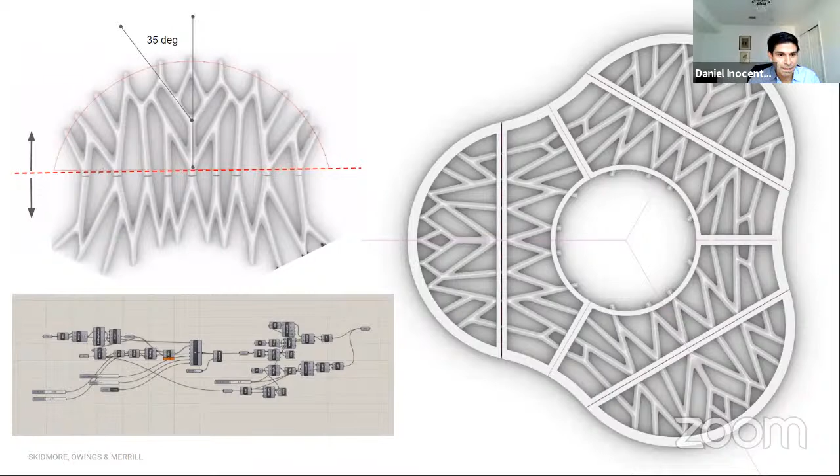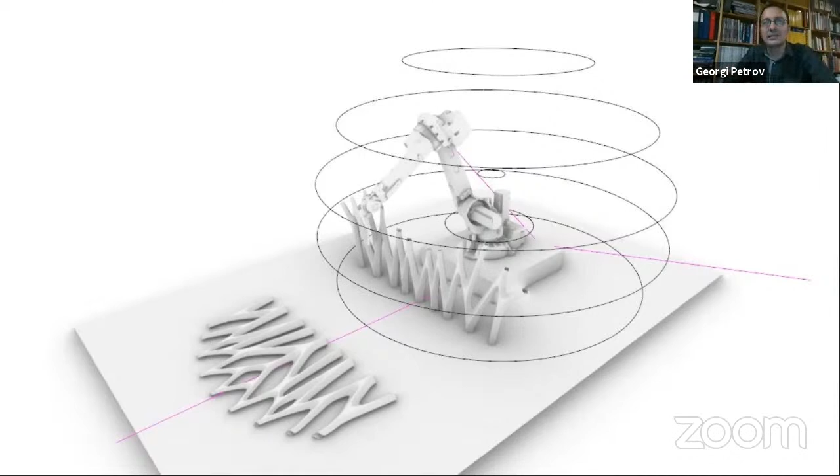Then we had to study how to adapt the floor to make sure it's printable within the reach of the robot. This is the sphere that the robot can reach around to print, so we tested this before starting the prints.

Then we had to develop a way to take the 3D printed geometry and marry it with the floor finish, which was supposed to be glass in this case, obviously not for the moon, and connect it to the rest of the structure. So we came up with this frame to make it fit around.

We studied and engineered it over several steps to make sure it's absolutely the lightest possible. This was designed for 1G to be used on Earth and for assembly loads, so it's actually a lot bulkier than what you would need for 1/6G with only 4 crew members on the moon.

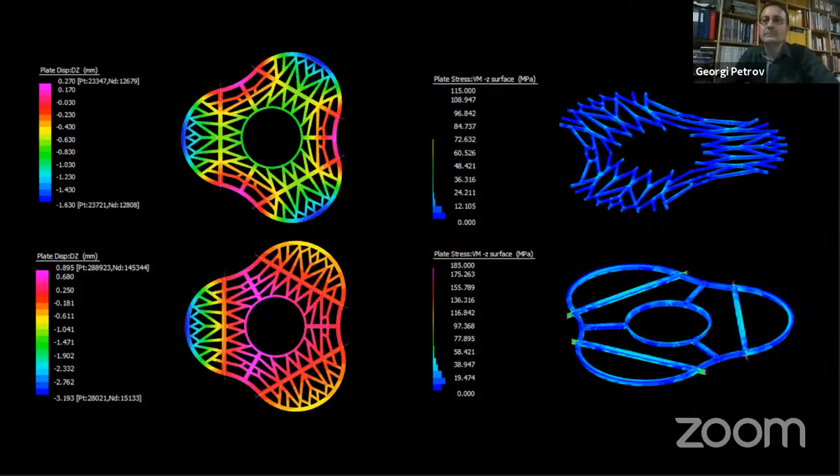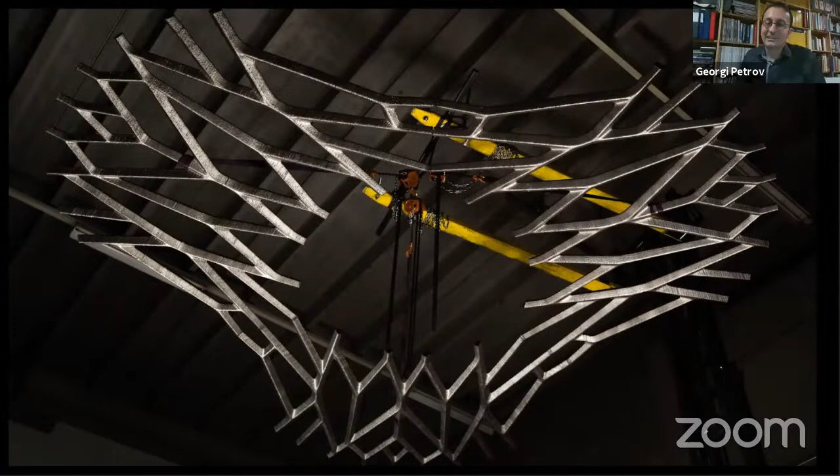And so MX3D actually 3D printed the whole floor for us. This is an image of the final geometry on the floor, all of the 3D printed geometry for all three petals.

Unfortunately, COVID put a wrench in our plans. We have a lot of the pieces of the habitat fabricated, but our general contractor pulled out at the last minute, so we could not put the pavilion together. But we did retool our exhibit, so we do have a model of the whole habitat, and a pretty big model of one of the individual units with one of the petals taken out.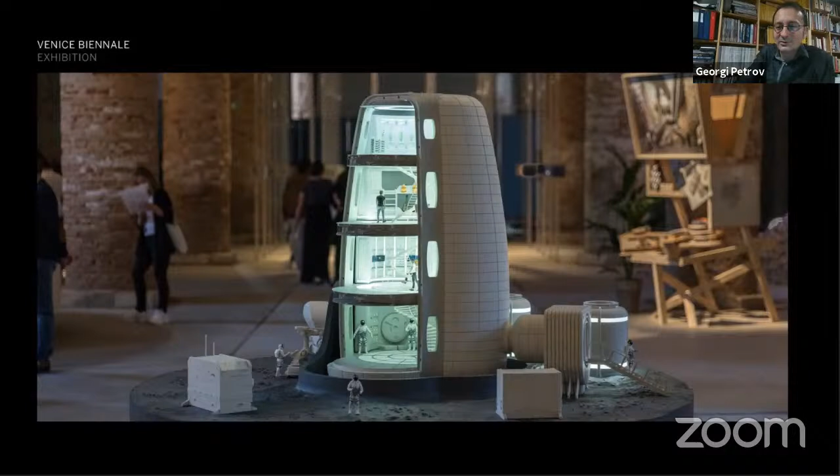So this is out in Venice until the end of November. If any of you are there, you're welcome to go and visit.

But then at the end we concentrated on producing a video that Daniel alluded to, which I think we'd like to show you at the end to conclude, basically telling the story in a few minutes. Let me see if I can bring it up.

Yeah, and this was a collaboration still with ESA, with Jeffrey Hoffman, and with the team members from SOM.

Can you hear the sound? You have to enable sound in the options above. Yeah, then maybe you can make it full screen.

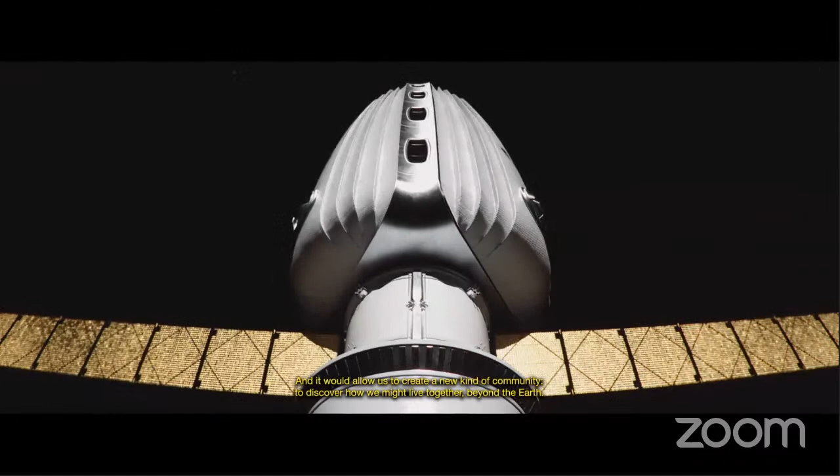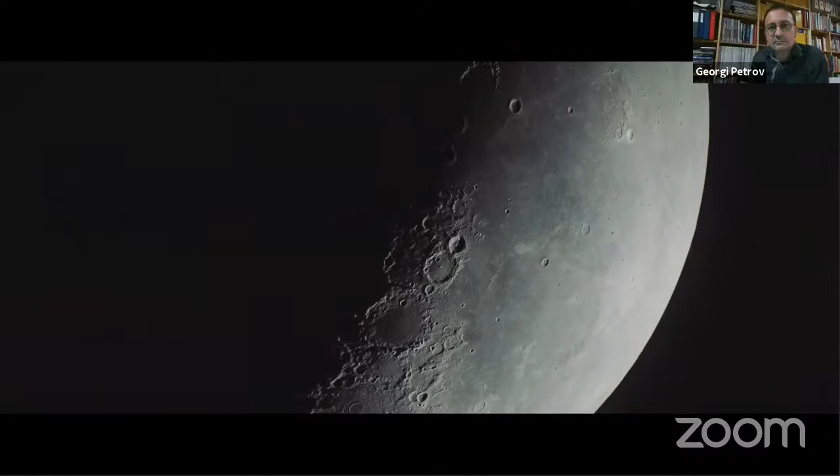More than 50 years have passed since humans last traveled to the moon, and there's still much we don't know about the brightest object in our night sky. What would it mean to return to the moon today? To leave more than flags and footsteps? To create a sustainable home? It would open new avenues for science. It could kickstart an outer space economy. And it would allow us to create a new kind of community, to discover how we might live together beyond the Earth. The European Space Agency's concept for a moon village is an international endeavor, bringing together governments, industry, and perhaps private entrepreneurs to support a permanent human presence on the moon. If an earlier era of space exploration was driven by competition, this one will be defined by collaboration.

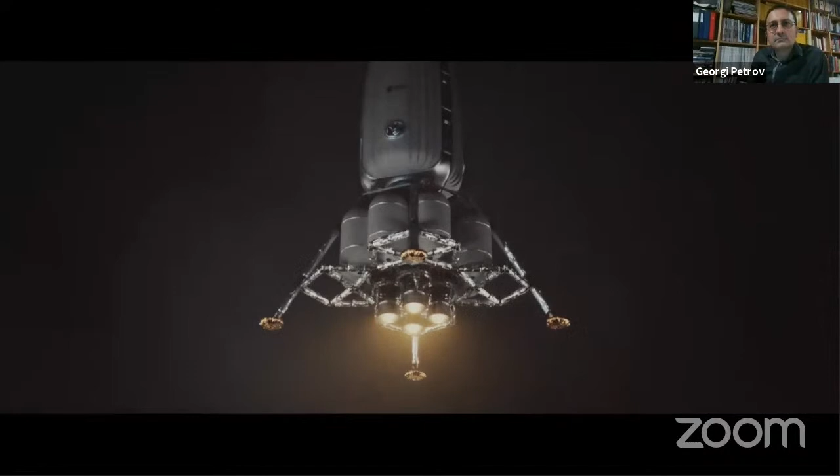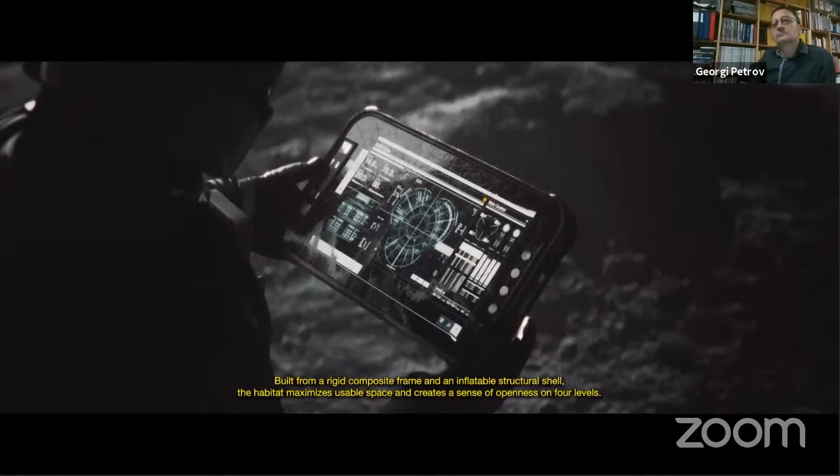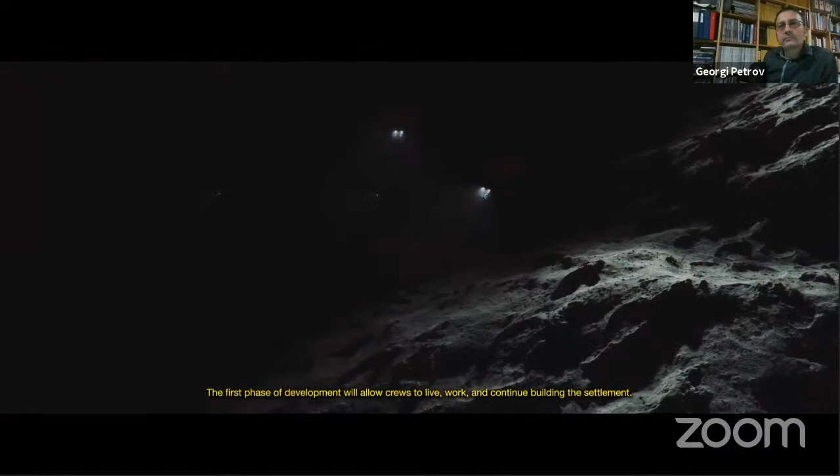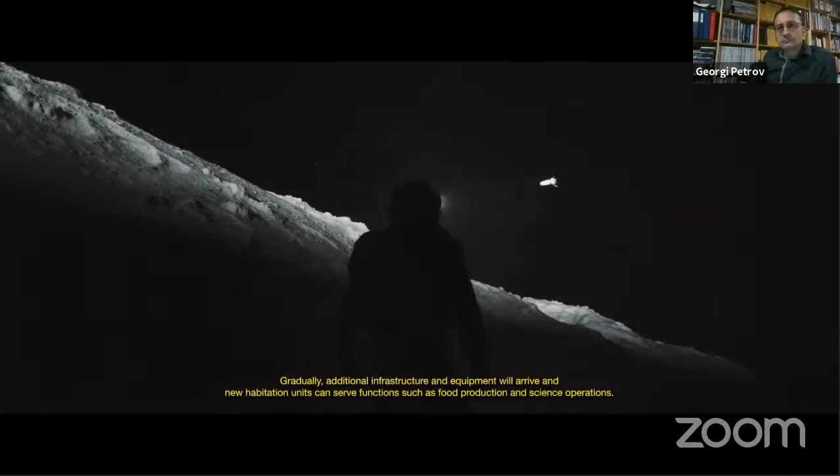What would it take to truly thrive in space? How could we make the moon feel like home? Built from a rigid composite frame and an inflatable structural shell, the habitat maximizes usable space and creates a sense of openness on four levels. The first phase of development will allow crews to live, work, and continue building the settlement. Gradually, additional infrastructure and equipment will arrive, and new habitation units can serve functions such as food production and science operations. Eventually, the Moon Village will grow into a thriving community - a hub for science, exploration, and even tourism.

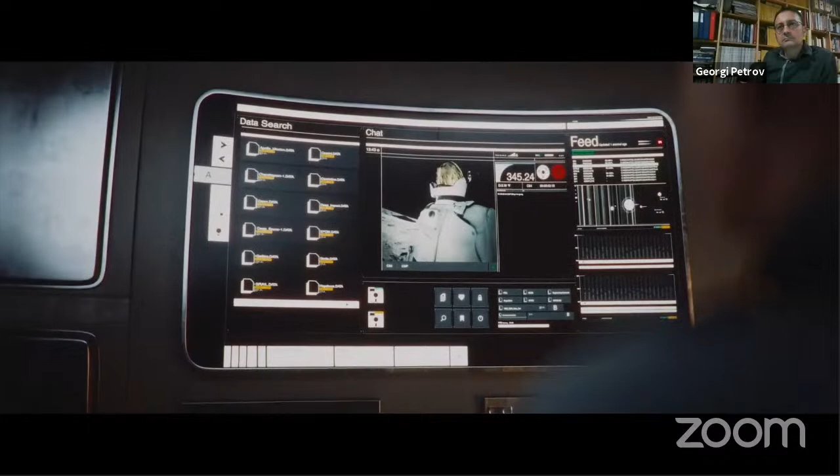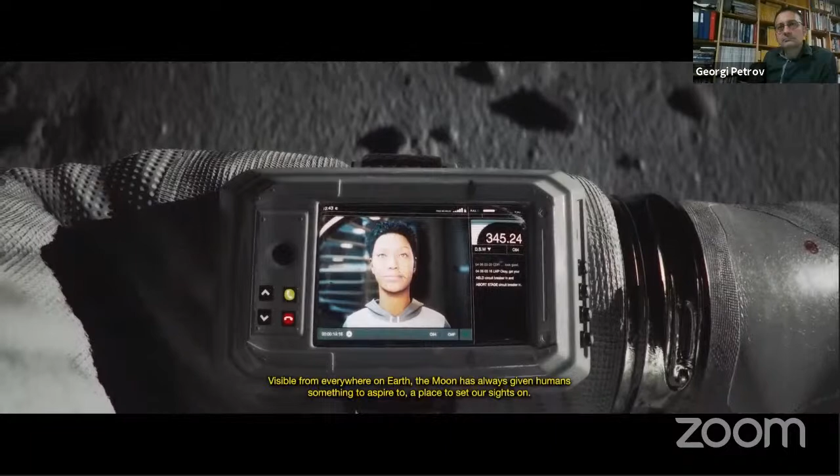Visible from everywhere on Earth, the moon has always given humans something to aspire to, a place to set our sights on. And soon, it will be a place we might call home.

There you go - November 21st is when it closes. So that's kind of the story that we have about our vision of the Moon Village. And I think, Sandra, we can take some questions now.

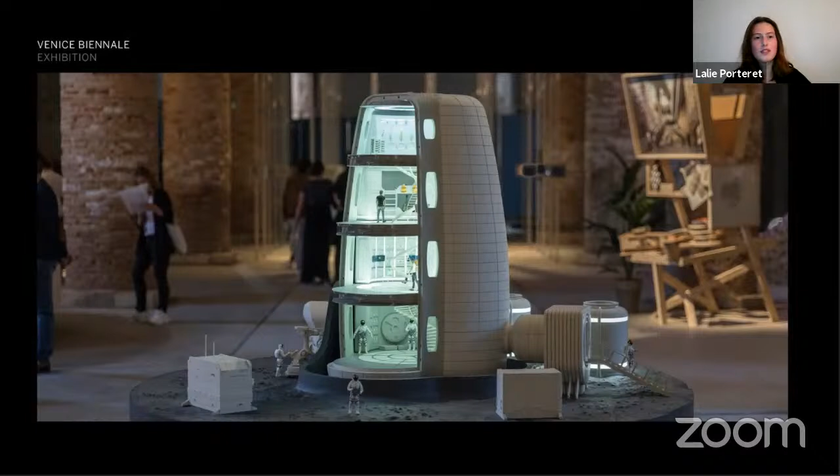Thank you, Aspetter, for this question. So I wonder about the purpose of the project and its future realization. When can we know and say that the project is ready to be carried out and can be launched, and who validates the project, and how can we test and be sure of the functioning of these units, and can we be sure of this?

That's a really hard question, because I think the purpose of the project was to bring together a lot of different experts who are interested in this big picture idea. Everybody who's an expert is always focused on one aspect of a certain technology. When you give everybody a target like this, a vision that drives all these different capabilities and skill sets, it gives people something to build on. The purpose was really to inspire and give everyone around the world an indication that there's interest in this, that there's possibility to make this happen if all the right collaborators come together. Obviously this wouldn't happen near term, but we studied a lot of really unique opportunities here.

That's what we wanted to introduce to the thinking behind space architecture. How can you master plan? How can you design a habitat that would be multi-purpose? How can you integrate all these various technologies? And what would it take to bring all this together? And then, who validates this?

This would be validated by government agencies, by manufacturers, contractors working on different technologies. This would take a lot of testing. It's very expensive to validate these kinds of technologies for human spaceflight, especially since as soon as you introduce a human element, things get very complicated and complex. For example, just the shell and metal frame interface would take a lot of investment and rigorous testing to ensure it works. You don't want to design something like this and just build it and send it out there. What we were trying to do is demonstrate that there are unique opportunities for combining these different ideas together.